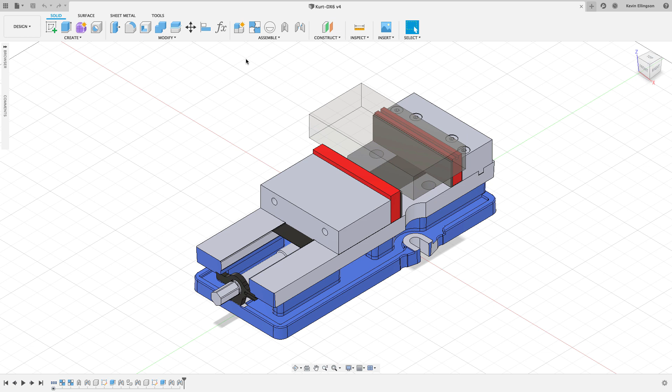And what do I mean by smart vise? I mean that we can go to the change parameters function, and in this particular case I have the ability to change the parallel height, width, and thickness, and the stock width, depth, and thickness, and also shift the stock. So if I were to change this number to be 10, you'll see my stock gets much wider. If I set this to be 5, you'll see the vise jaws open more. If I set the thickness to 3, you'll see it gets taller.

And if I offset it in the X or Y direction, I'll do 2 this way, or I'll do -2, and you'll see that the part moves around inside of the vise.

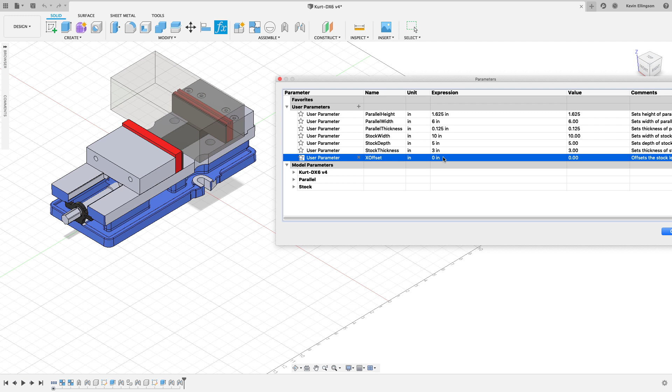In order to do this, we have to use a combination of parameters and some of the direct modeling capabilities inside of Fusion to get rid of some of the items we don't need, or to line things up, kind of get this vise moving the right way. Then we're going to talk about adding some joints that control the motion of how all these things work, and we're going to dive into parameters, both model parameters as well as user parameters. So stay tuned. We're going to go through and work on this vise project, and soon you'll be able to make your own parametric vises.

All right, so now that we know what the goal is, I've switched over to my web browser, and I've gone to kurtworkholding.com. You can choose any vise manufacturer that you want to visit for this. Most of these people are going to have their models available on their website, and if they don't, you should contact your salesperson, who can probably arrange to get you the models that you want.

I'm going to go to the work holding products, and I'm going to choose their Ang-Lock and D-Series vises, and then the one I want is this Kurt DX6. Now, it gives me a bunch of information, but the thing that I really care about is down towards the bottom. I'm just going to click on this little

CAD module thing. And I want to do a 3D, but I want this to be in step format. So I'm going to go find the step format. Then I get a couple choices here, AP203 or AP214. These are different standards. You can check them out on Wikipedia if you want to see what the differences between these two are. I always like to go with AP214 if I can.

I don't want this to be zipped, so I'm going to uncheck that. I'm going to choose download, and then Kurt's website comes up and says you can drop this into SolidWorks, or if you just want to download it to your computer, click on this link, and that's what I'll do. And now I have that file downloaded to my computer, so I can switch back over into Fusion.

I'm in a new design. So to open this file up, I'm just going to go ahead and hit the File Open button, browse to my computer to my Downloads folder, and there's the file, and I'm going to choose Open.

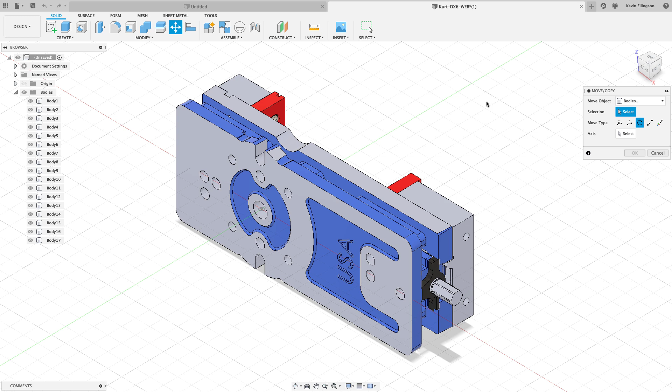I'm going to use some of Fusion's built-in direct modeling tools, and then I'll use history later on. The first thing I want to do is a move command, using move copy found under the modify dropdown. I have to decide what I want to move - right now Fusion is set to bodies, and if I look, all my bodies in this model are bodies, so that's okay. If I had components, I'd want to use components instead. So I'm going to click on the first body, hold shift, and click on the last body.

Then I'm going to click in axis select, and I think the axis I'm going to want to use is going to be under the origin - it's going to be the x-axis. And now I'm just going to pull this, rotate it 90 degrees, and hit OK. Now I have it in the right orientation that I want.

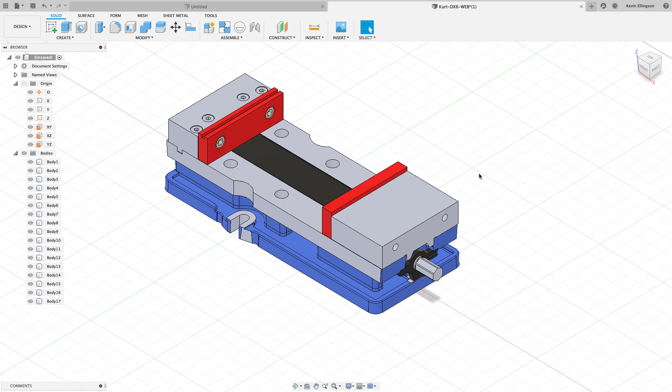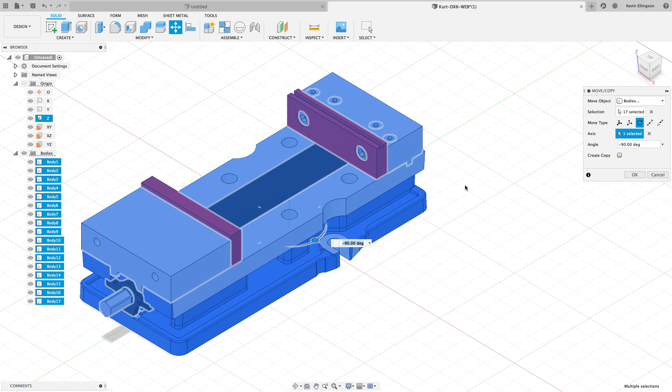I'm going to do another move, selecting the first body and the last body while holding shift down. This time I want to do it around the Z axis, so I can click on my home button. I'm trying to get this oriented how it would be in the machine table. So I'm going to do a -90 so that the front of the vise matches the front of my view cube and would match the table on my machine. And I'll go ahead and hit OK.

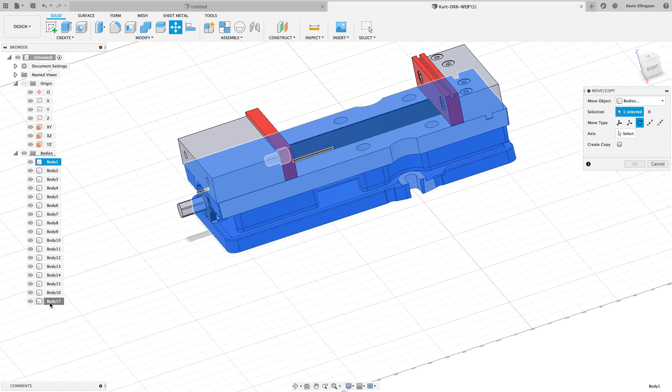The next thing I'm going to do is a little bit nitpicky maybe. If you note that the origin is sunk down below the face a little bit, it's not on this bottom face, so I think I'll do a point-to-point move to get that all set up. I'm going to do the move command again, clicking on the first body and the last body, and this time I'm going to do a point-to-point. My first point is going to be the intersection of that circle right there, and the target point is going to be my 0 origin dot. When I hit OK, it barely moved, but now you can see the crosshairs are exactly on that bottom face of the model. I've got my orientation set and out of the way.

Now I'm ready to start doing some other things in this model that I need to do before I can move forward. I want to go through and clean things up a little bit. Remember, the goal is to get an accurate representation of the envelope of this assembly, not to make everything exactly perfect. So a good example is, do I really need to track these 4 screws on there? Am I really going to change these out as I'm creating my setups inside of Fusion CAM? And the answer is no.

So we can use the combine command inside of Fusion to combine these bodies together. I'm going to use combine, and the target body is going to be that non-moving jaw. Then the tool bodies are going to be these parts going across here. I'm going to select those and hit OK. Now you'll see when I turn off that body, I got rid of everything that was associated with it - I turned that into one lump part right there. That's going to help me have less parts that I have to deal with on this model.

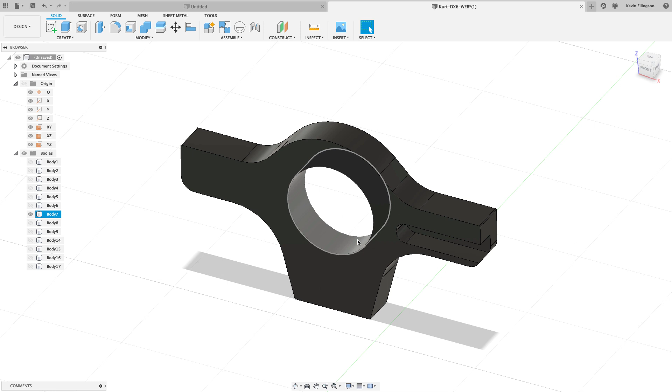I'm going to isolate this - right click and choose isolate. I guess I have to do it over here, right click and choose isolate. Now I only have this particular part left. I'm not going to be able to combine the shaft that goes through here because the diameter is a bit bigger, but what I can do is use Fusion's direct modeling - I'm going to click on that face and delete that off. Now I just have that part. So I'll right click and unisolate.

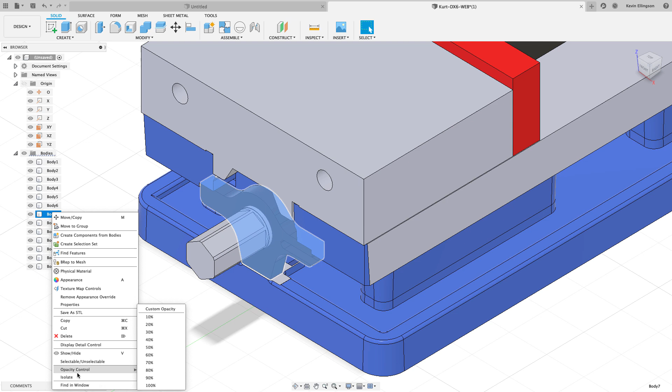And then now I want to have parts 4 and part 7. I guess I can isolate this again, and I'm going to turn body 4 back on. So these are the 2 parts.

I'd really like these to sort of be one, so I'm going to combine these together. My target body is going to be this, and the tool body is going to be this, and we're going to do a join. I'll hit OK, and now those have turned into one single body.

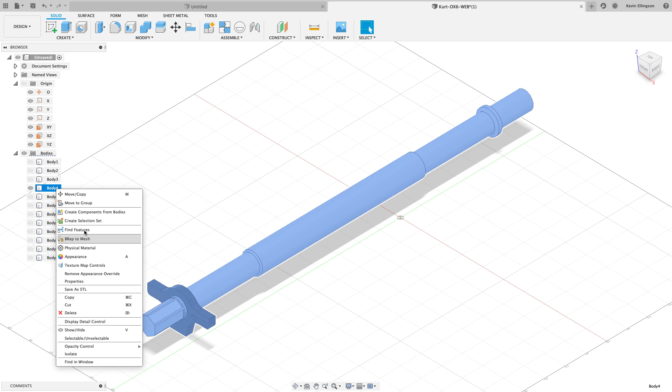Sometimes Fusion gets a little confused here, and because the body that I originally isolated isn't gone, I can't unisolate it, so I just have to manually come back and turn the light bulbs on to get that taken care of. Now you could do this for as much or as little as you wanted to.

You could, for instance, take these bolts and make these be part of the jaw as well, and the same thing on this backside. Maybe I'll try to do that. So I'm going to do a combine, and I'm going to say this is my target body, and my tool bodies are going to be this and this. Let's see if Fusion will let me.

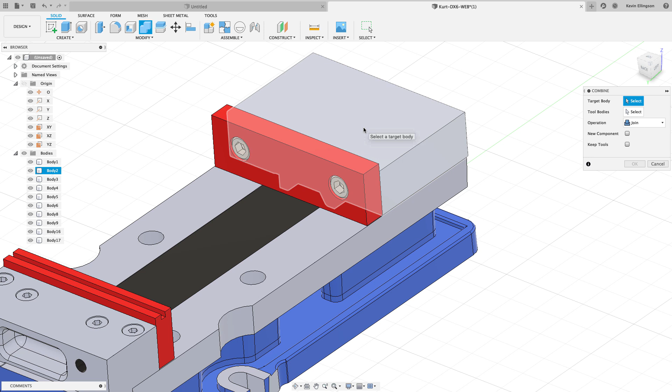And I'll hit OK. And now if I go find this body and switch that off, you can see it did — it allowed those screws to be part of that. And I can come over and do that one more time on this side. We'll say combine one more time. I'm going to choose this as my target body, and the tool bodies are going to be these two bolts. And now we'll hit OK.

And then if we check it to make sure it works out, it looks like it did. Everything is kind of going the way I want it to. Now I'm reducing the number of parts that I have in my model here.

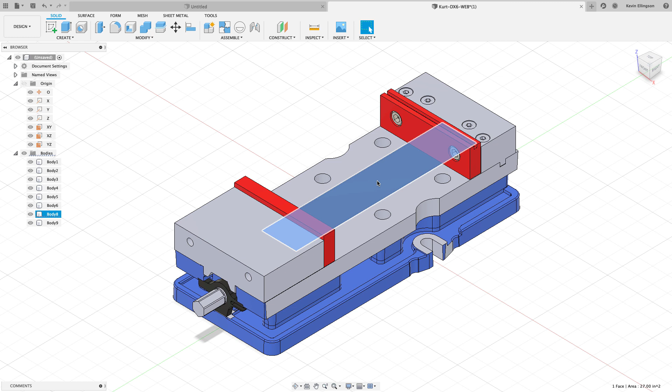There's a chip guard here as well, which might be a nice feature to have for actually doing the machining, but inside of the CAM setups, I don't know if that's really all that necessary. So I could either combine that, or I could just come here and delete it out. Let's find that body and do it out of the browser instead. So now I got rid of that.

I could have also cut it or combined it with the main body so it couldn't have moved around, but it's your choice of how you want to do something like that. But we've started to reduce the number of pieces that we have inside of our assembly, so we don't have so many things that we have to do joints or rigid groups to make this all work out.

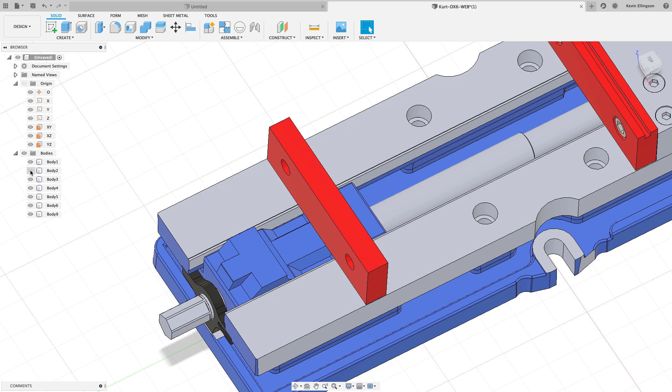I think I want to do a little bit more combining now that I think about it. If we were to look at body 3, which is a little — if I turn off body 2, you can see 3 better. I think they call it kind of like a nut or a shuttle nut or something like that. It's the thing that allows everything to slide back and forth. And then this is the moving jaw, or the moving body, I guess.

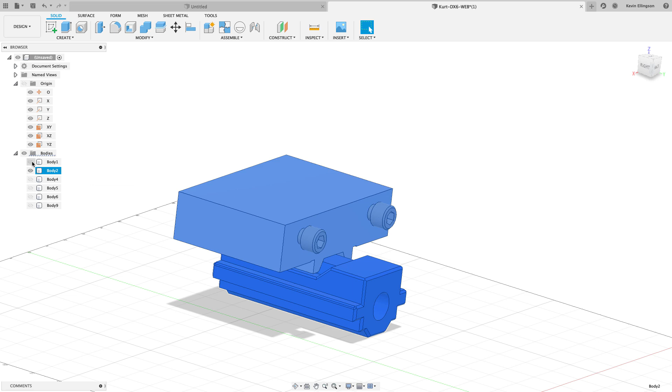I can combine those two things together as well to make life a little bit easier. So let me isolate that part and then turn body 2 on as well to make things a little bit easier. And now what I'm going to do is say combine, and this is going to be my target body, and this is going to be my tool body. It's going to be a join, and now we just got rid of one more piece. And then I'll just turn the visibility of these objects back on.

So the vise still looks exactly the same as it did when we first started, but we've reduced the number of bodies significantly on here, and we still have the same quality envelope that we started with in the beginning.

So now we can start to kind of position things and move them a little bit better where I would like them to be. This may be a little bit of my OCD kicking in here for this next step, but what I would like to do is position the two jaws so that they are shut together. There's no gap between them.

And one of the reasons I like to do this is later on we're going to put a slider joint on, and if we have the two vise jaws set together, we can easily do a minimum of 0 and a maximum of however the vise manufacturer says that this jaw can open up.

If you use stock sizes that are smaller or bigger than what the vise can do, you'll get a warning message letting you know there's an issue, which could be helpful down the road.

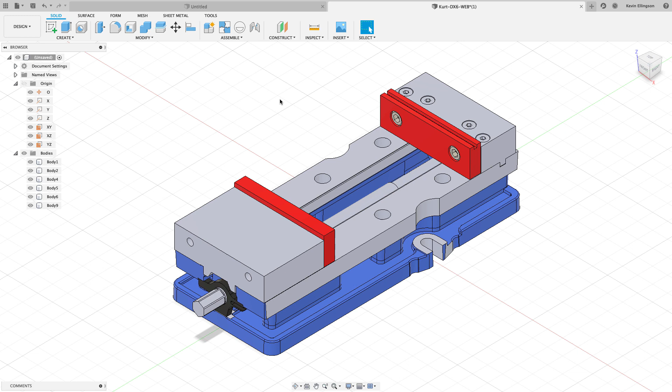To get these things lined up, I'm going to use the move command. But before I move it, I want to know how far it is between these faces. I'll use the measure command, clicking on one face and then the second face, and Fusion tells me that's 2 inches. I can either remember that, or if I click on the number in the measurement, it copies it to the clipboard so I don't have to type that number in.

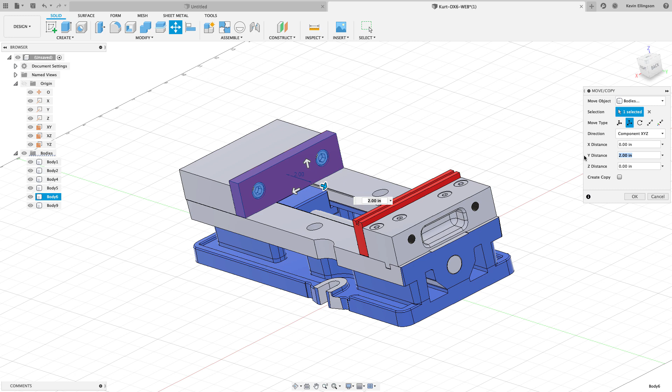So I'm going to use the move command. I'll use the translate, and I have to translate these two components twice. I'm going to click on this face, and move it the direction I want to go, putting that in the Y. I'll just do Command V on a Mac, or Control V on Windows, and it's going to move that into position for me.

I'm going to do that move one more time. I'll grab this component and drag it the way it needs to go, and again paste that number in. I'll hit OK, and now I have my vise jaw, or my moving vise, completely shut.

There's no gap there anymore, so I know everything is zeroed out, so that later on when I start adding my joints, I know exactly where the zero is and the maximum opening range of this vise jaw is going to be. This isn't 100% necessary - in fact, you could skip this completely and let the stock take care of it. You just won't be able to set the limits quite as easily as what I'm going to show later on.

So we've got this thing positioned, and you can see how nice it was to get those elements put into place just by using the move command. I haven't had to use a lot of rigid groups or joints yet to get things moving the way I want them to.

If you look in my browser, I have some things that are body names - body 1, 2, body 4, body 5, body 6, and body 9. Not very descriptive names. So I'd like to give these things meaningful names before I create components from them. I'm going to slow double click on body 1, and call this vise body. So now we have a vise body for that part.

I'll go to the second one - we're going to call this moving jaw. Go to the third one, and this is going to be screw assembly. Go to the next one, this is going to be fixed jaw. This one is going to be called jaw plate. And then the final one is going to be called grooved jaw plate. So those all have meaningful names.

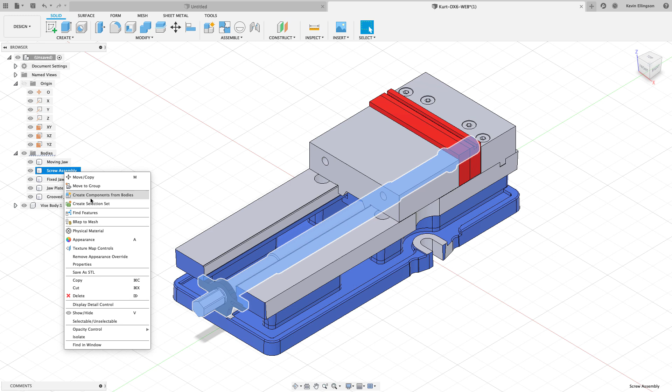Moving jaw, I'll probably hold off on that a little bit. I'll do my fixed jaw next, create components from bodies. I'll do my moving jaw, create component from body. I'll do my jaw plate - actually, let's do this grooved jaw one first, and then the last one I'll do is the jaw plate. I'll create the components from the bodies.

So now I have individual components in my design that I can add joints and things like that to. I'm ready to lock down the locations of these and start to make these components move around as this vise would. Let's take a look at how we're going to go about doing that.

All right, I realized I forgot a really large step along the way.

It's not that big of a deal, but I haven't saved this design yet. So I went through and saved it, but what you're going to want to do is go up and click on the save button, give this file a name, and choose where you want to save it in your project. I've got all of my cleanup work done in direct editing mode, and I think I'm ready to go and capture my design history from this point out.

But before I would do that, I wanted to point out that if I were to click and drag on this vise body, nothing happens. I'm not dragging and moving any of the parts. So to capture history, I'm just going to right click on my top level design and choose to capture design history. And now we'll see the design history appear down at the bottom.

And now if I try to drag on anything, everything is free to move wherever it wants to. Obviously I don't want that to happen, so I'm going to go ahead and revert that. You can use as-built joints for this. We're going to use some joints for this. We could do rigid groups. I'm going to do a combination of all of those so you can see the differences specifically between an as-built joint and a rigid joint.

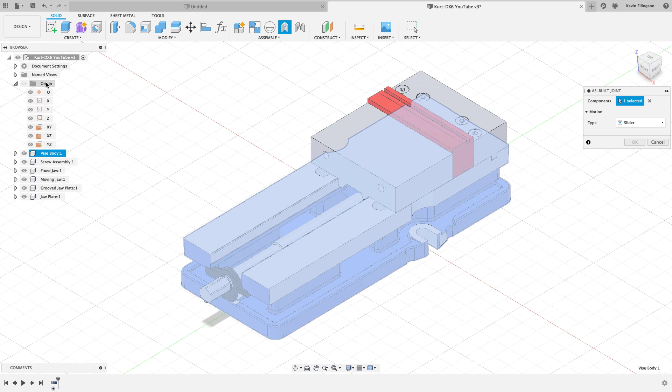So the first thing I want to do is make it so this vise body can't move around anymore. I'm going to recommend that you do an as-built joint between the vise body and the root of the origin folder, right where it says origin, and go ahead and click on that. We want that to be a rigid joint so that it's bonded and welded right into place. Go ahead and hit OK.

Now I can keep moving around. Maybe I'll do a rigid group between the vise body and the screw assembly, and I'll go ahead and hit OK. So two different ways to accomplish the same thing. Neither of these things will move now. I can keep working around, choosing whether I want rigid groups or as-built joints.

I think I'm going to use as-built joints, and I'm going to choose an as-built joint between this fixed jaw and the vise body itself, and I'll hit OK. Then I can keep going around. I'll do an as-built joint between the groove jaw plate and the fixed jaw.

That might have been one where if I would have done a rigid group, I could have gotten the vise body, the fixed jaw, and the jaw plate all in one, where I had to do that in two separate joints to get the same thing done. We'll do one more as-built joint between the moving jaw and the jaw plate, and I'll go ahead and click OK.

Now nothing is moving around anymore except for maybe the one thing that I want to move, which is going to be this moving jaw assembly. You can see I can move that and drag it around anywhere I want to. Obviously I don't want it to be just dragged out anywhere willy-nilly, so I'm just going to go and revert that and put it back into place before I create a joint that's going to control the motion there.

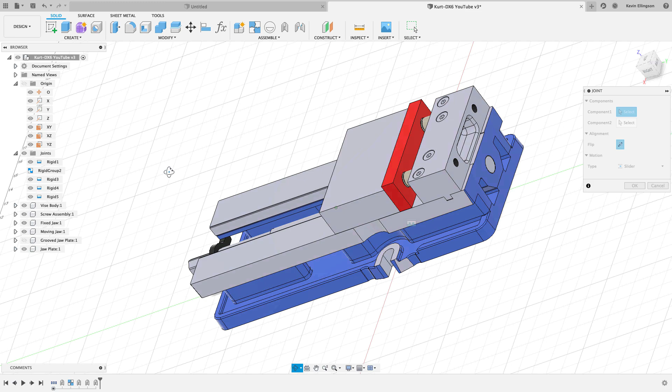So I'm going to start the joint command, and Fusion wants to know between what two components. Let me turn off the groove jaw plate just to make this a little bit easier to see. I'm going to scooch in here and grab the center dot right there on that face, so that's going to be my first selection. I can turn off that jaw plate and turn on the other jaw plate now, and make that same selection over there, and go ahead and click on that.

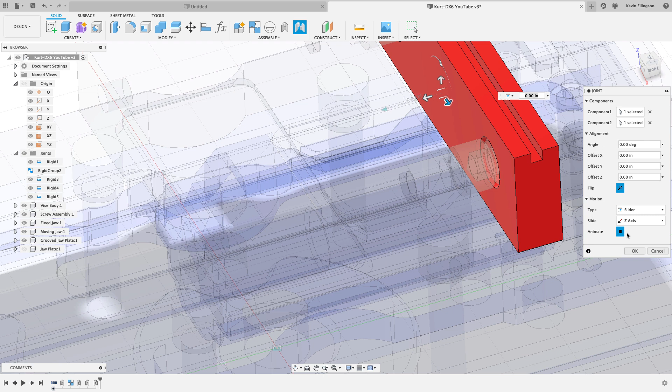And now I want to see a slider. So if I animate this, the thing that I really care about is when I see this number, in this case you see how the number is positive, not negative. I want that number to be positive. If yours is negative, you have to select your jaws in the opposite direction that you originally chose. So I'll go ahead and choose OK. Now I go back to my home view. Let's turn my jaw plate back on.

And now you'll see as I drag this back and forth, I'm able to get the motion I want, except for I can make the two bodies go through each other, and I can open this up way too much. So let's take a look at how we can fix that.

So the way I'm going to do that is I'm going to find this slider joint and edit the joint limits. Before I do that, I'm going to revert this back into position. Now I'll come back and edit the joint limits. I'm going to turn on a minimum, set that to 0, and a maximum of how far this jaw is able to open up. So I'm just going to go ahead and say 9 inches.

I don't really even know what the value is for this - I'd have to go look on the Kurt website. But earlier on, when I moved these two vises together and put a 0 gap between their faces, that was the reason I wanted to do that. So the minimum would be when they're touching, and then however far these vise jaws can open up. I'll go ahead and hit OK. Nothing really changed, but now when I drag this, I can drag it back 9 inches, and I can drag it to 0. And so the vise will open and close that way.

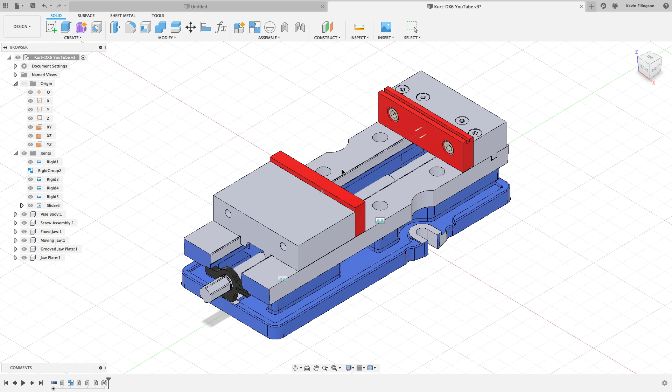And I'm also starting to see some visibility of joints on the screen. I can either turn off the root of the joints folder, or I could start shutting off the eyes for the different joints that I want to appear. It's not that big of a deal right now, so I think I'll leave them all on.

And we'll go learn a little bit about parameters and how we're going to make our parallels and our stock and then put them into position. Before I go any farther, I want to make sure I revert everything so that Fusion doesn't try to capture the position. So now I'm satisfied with everything I've done with this step model. I've got it positioned, and the jaws are opening and closing.

And now I want to start drawing some components that represent the parallels and the stock. I'm going to rely on one of the key features inside of Fusion called parameters. If you haven't used parameters yet, they're what makes using programs like Fusion so powerful - every number that you type into Fusion is being tracked by the system in some way, shape, or form. And you can always go and manipulate those numbers.

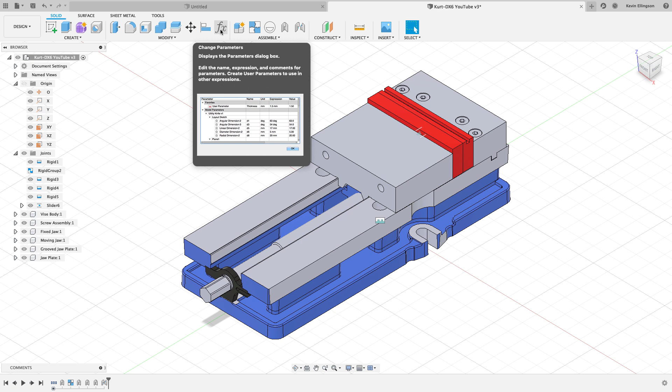So I'm going to use my FX function up here to get to the parameters. If you don't have this pinned yet, go to the Modify dropdown, and you'll find the Change Parameters button right there. So I'm going to choose Change Parameters, and I'm going to make some user parameters before I even get started. I'll just hit the plus, and I'm going to call one parallel height, in inches, and give this a height of 1.5, then give a description of 'sets height of parallels.' So the next person that needs to use this will understand what this parameter does, and I'll hit OK.

So I've created this parameter. This parameter essentially does nothing so far - it's just a parameter, not tied to anything, has no bearing on anything yet. Later on, we're going to make use of all these parameters when we create our parallels and our stock.

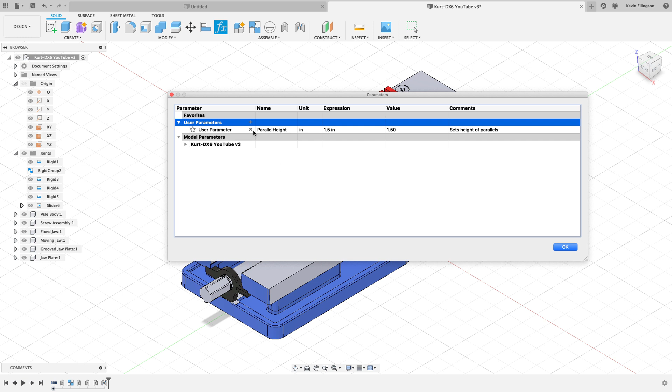So I'm going to do another one. I'm going to call this parallel width. You can see I'm using capital letters for each of the words that start this out - you can use whatever format you want here. The important part is the parameters you're going to refer to later are case sensitive, so if you want them to recall properly, you have to use capitals and small letters the same way you did when you created them. And the expression for this, I'll call it 6, and say that this sets the width of parallels. Go ahead and hit OK. And we want one more called parallel height.

So there we go, we'll call this parallel thickness, which is what this one needs to be. You saw that turned red, saving me from myself, because we have to have unique parameter names, and there's certain parameters that we can't use that the system has reserved. Like you can't call a parameter inch, in, mm, or foot or whatever it might be that's already reserved by the system. I'll call this 1/8 of an inch thick, and say it sets the thickness of parallels, and hit OK.

So now you can see that we have the comments here. I have a few more parameters to go. I'm going to call this one stock width, and we'll call this 8 inches, and I'm going to say sets stock width, and hit OK.

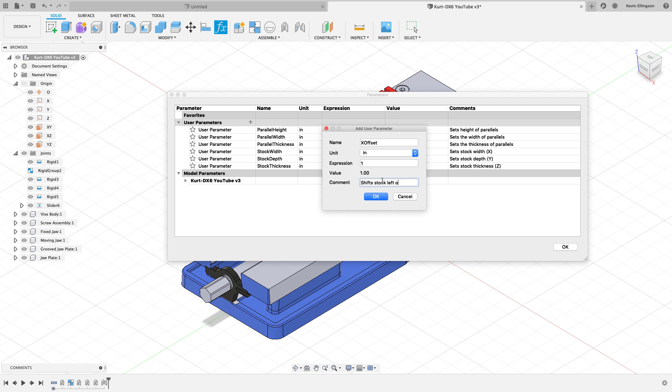I want to do one more. I'm going to call this one X offset, and I'm going to give this an expression. I don't have to give an expression of anything, I'm just going to give it an expression of 1, and I'm going to say shifts stock left or right. And we'll go ahead and choose OK. So those are the different parameters that we're going to reference later on as we go through and do the rest of our modeling. I'm just going to go ahead and hit OK.

And now I can come and pretty much shut all this off for a little bit. I don't need to see any of it. I could even shut off my joint visibility here if I want to. So I'm going to right click and say new component, and I'm going to give this component a name, and I'm going to call this parallel, and go ahead and click out of there.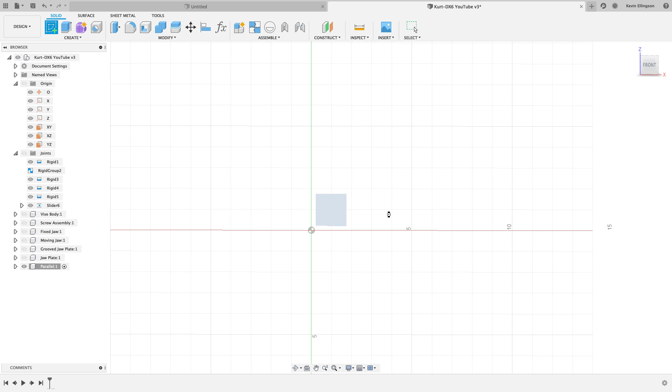And now I'm going to create a sketch on this front plane, and I'm going to sketch a rectangle, a center point rectangle, and I'm going to drag this out. And now instead of typing in numbers I want here, I'm going to refer to those parameters. So I'm going to call this one parallel, and see, as soon as I start typing that, it gives me choices. That's going to be my parallel width, and I'm going to hit tab, and then I'm going to call this parallel, and this is going to be my height.

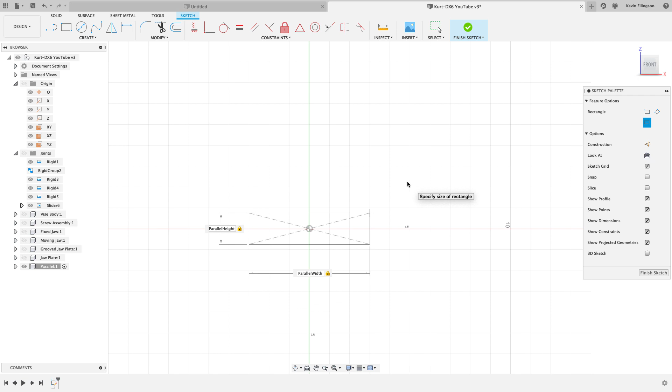And now when I hit OK, it's going to go FX and FX, and it refers back to those parameter names that I created, so that it's already set to those values that I set when I created the parameter names. Go ahead and extrude this, and I'm going to call this parallel, and we'll call that parallel thickness right there. And there's my parallel that I'm going to work with.

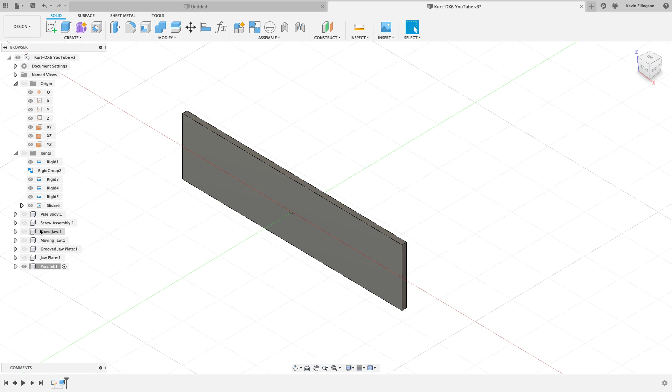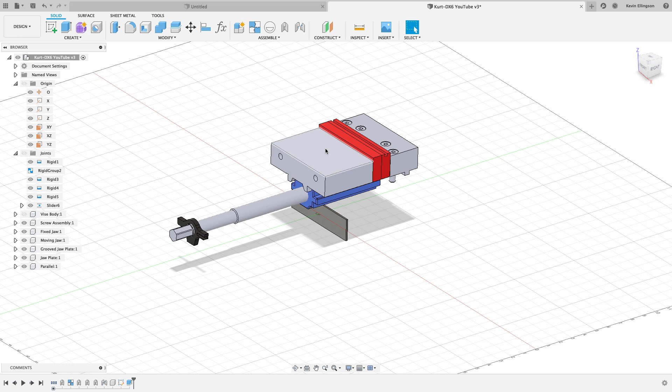All right, so I can start to turn this stuff back on again, and then I'm going to activate the top level assembly. Now, almost always, I don't need to see my vise body here either. I can shut that off to make my life a little bit easier. Almost always, I don't want you to ever really have to deal with this capture or allow, or capture or revert, I should say. I kind of was thinking of the PC and Mac commercial, cancel or allow. But in this case, I want to make it easier on myself to get these parallels stuck in there.

So I'm going to open this up. And when I do this, capture position or revert is going to pop up. I'm going to choose to capture the position here. And then later on, we're going to come back and we're going to delete that.

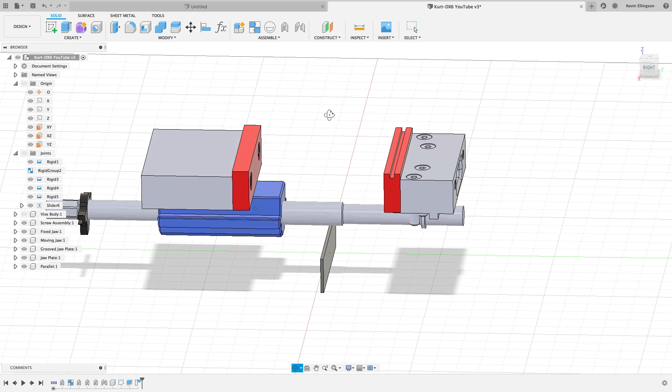So now what I want to do is I want to position my parallel in place by using a joint. So I'm just going to go find the midpoint right there. Let me do that again, I missed it. Little helpful tip, if you ever want to lock on to certain places, if I hold the control or the command, depending on if it's Windows or Mac, I can lock onto those so that I can't go and shift anywhere else.

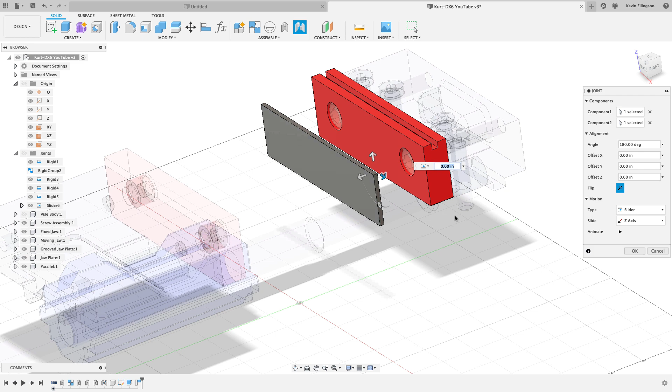And we'll just do the same thing right there and grab that spot. Now that parallel is going to move into this place. I don't want it to be a slider, I want it to be rigid. It's not going to move. And I'll go ahead and hit OK.

So there's one parallel. I'm going to right click on this parallel and say copy, and then right click on my design name and say paste. A second one's going to appear. Now I can move this around, make it a little bit easier to grab onto.

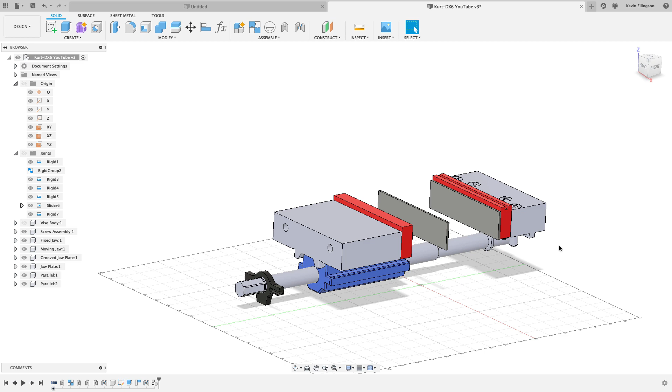And now I'm just going to do another joint based on that point right there, mating up to that point right there. And that's going to move into place. Now I've got a set of parallels created there. So that's good, I've got my two parallels in place. Everything's good to go. All right, now I can start creating my stock component.

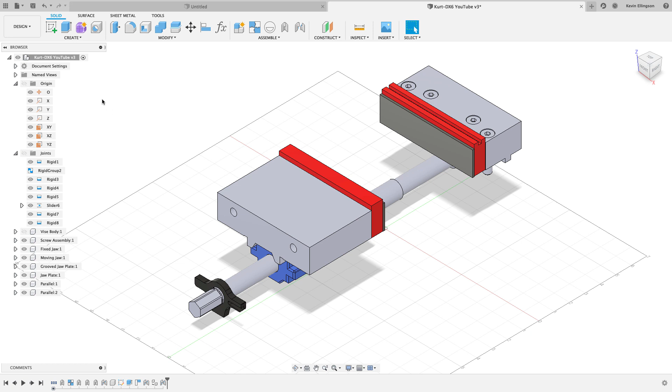So I'm going to come up and I can shut some of this off as well. I can leave it on, I can shut it off. I'll just shut it off to make it a little bit more viewable. I'm going to right click and say new component, slow double click on this newly formed component and call this stock. And then I'm going to create a sketch on the top plane, and I'm gonna do a rectangle,

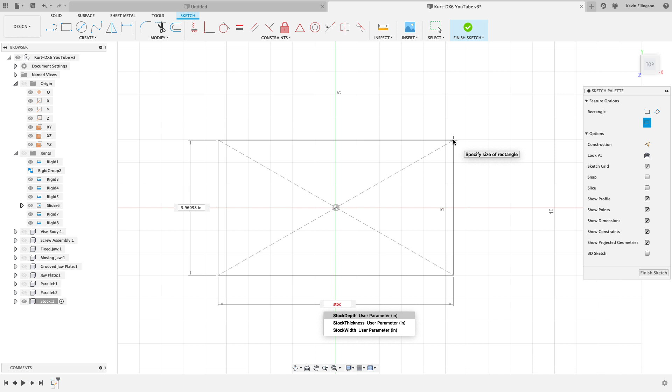center point rectangle, locked to the origin. Now I'm going to use those parameters I pre-created again. So I'm going to call this stock width and go select that. Hit the tab key, and this is going to be stock depth. There we go, so I got the size of my stock created. I'm going to finish my sketch.

I'm going to extrude this and call this stock thickness. And I'll hit OK, and now I've got the thickness of my stock created as well.

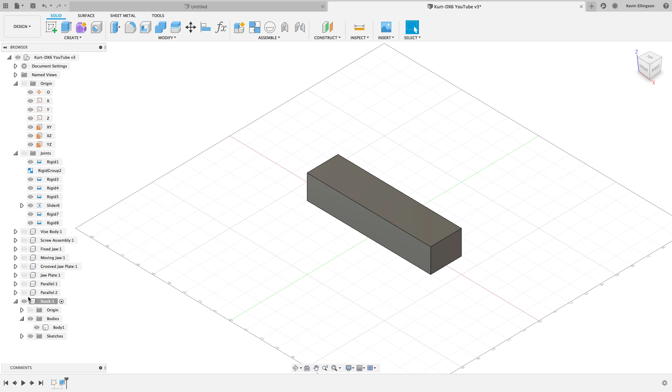When I use this in my designs, I'd like this to be sort of transparent. So I'm going to expand out my bodies, right click, and go find the opacity control. I'll set this to about 50 or 60%. It won't appear see-through until I activate the top level.

So let me just go and activate this top level. Now you can see that it looks more like glass, and I can come back and turn more of these components back on. I'm going to leave that vise body off for a little bit longer.

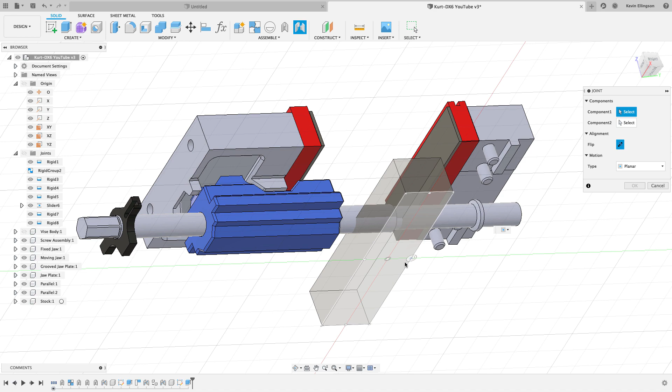Now I'd like to position this piece of stock on my parallels. So I'm going to do that by using a joint, and I'm going to select, the first one's going to be that position right there. I'm going to roll over, find this top face, and hold the control or command button down just to make my life a little bit easier to select that. And Fusion's going to use a planar joint.

I want that to be a rigid joint. And I've got that located. Now I like to drag it left to right, and that'll tell me what number it is I need to change in the numbers right here. I could also look at my work coordinate system and figure that out as well. But I'm going to call this my X offset, and that should automatically shift it over the 1 inch that we set up when we created this.

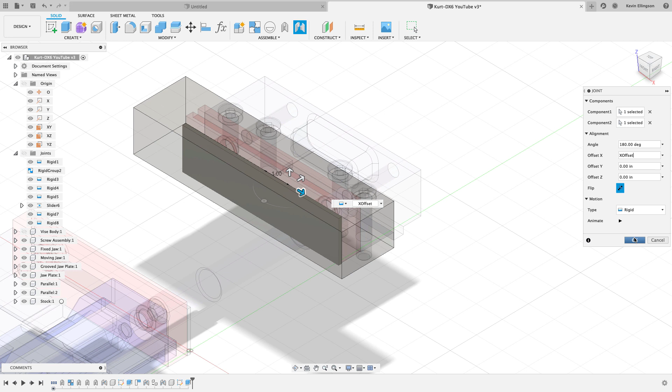We'll go back and switch that later on. We'll just go ahead and say OK there. All right, so that's looking pretty good. And now I think what I'm going to do is shut off this vise jaw visibility.

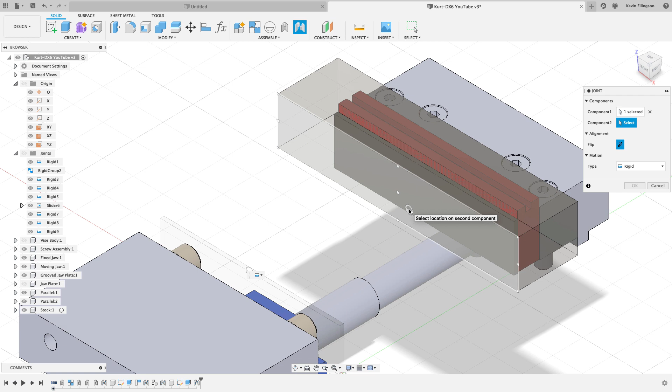And I'm going to do another joint. I'm going to choose to do it between this back face right there, and then I'm going to choose it somewhere right there, grab that point right there. And I don't want this to be rigid, I'm going to flip it right away, and I'm going to say I want it to be a planar joint.

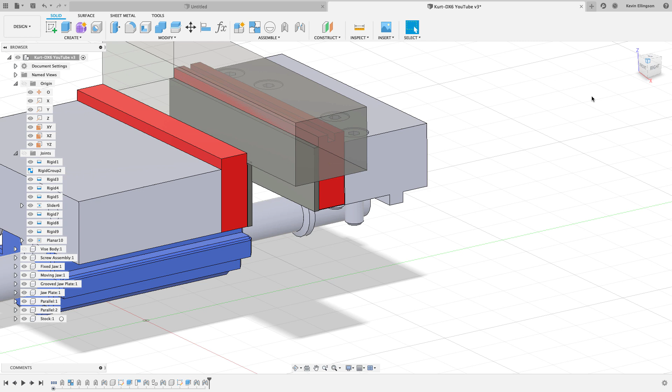Now when I hit OK, if everything goes well, that part should move up against where I want it to be. And if I turn that jaw back on, it should be positioned exactly where I want that to go. So now I've got my part sitting on my parallels, and everything should shift and work right now the way that I want it to. So I'm going to turn my vise body back on.

And now I'm going to go back to my parameters, and let's see if I can manipulate this around a little bit easier so we can make it easier to see. So that should be pretty close to working right there. Shift this down a little bit more. Okay, good. I'll move this off.

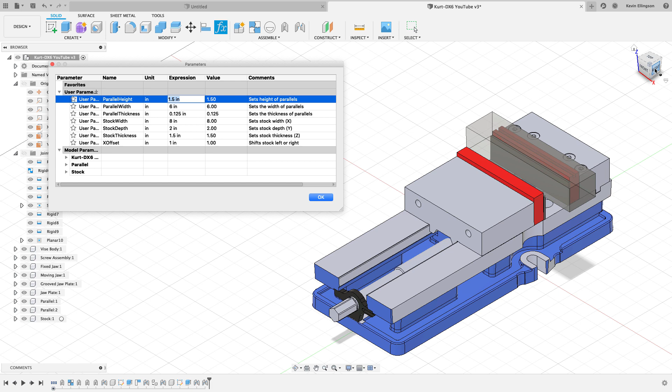I'll put the vise on the right and the part on the left. So now you can see if I were to look at this from the side and I change this to be 1.625, the parallels get higher and the stock shifts along with it. If I shift this over, I could change my parallel width to 7. It should get wider than the vise jaws.

If I change it to 4, it should get shorter than the vise jaws. Good. So let's shift that back to 6 where I want it to be. If I change the thickness, I'll say 0.05, it should get a lot thinner. And if I go back to 0.125, it should get back to the thickness I had it at.

So that looks to be working okay. I'll set my stock width to be 10. That shifts the right way. If I go to 4, that shifts the right way. Okay, so let's click that back to 8.

If I change this to be 5, it should open up. If I change it to be 0.25, it should close the vise jaws down quite a bit. So let's set that back to about 2. And then I'll change the thickness to 0.5. That looks good. Change it to 1. Maybe I'll just leave it right there.

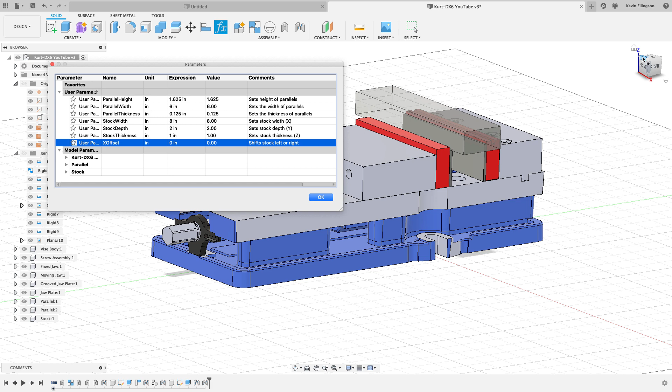And here's that shift. So if I set it to 0, it should now be able to look at it from a front top view. So there you can see it's exactly centered. If I put a positive number in, it should go to the right. If I do a negative number, it should go back to the left. So I pretty much have complete control of where my stock is positioned in my vise now.

And I'm pretty happy with how everything is working. So there's the steps that you can take to use parameters and some built-in modeling functions inside of Fusion to get your vise set up. So let's take a look at one more thing about how you might use this in a future design.

I'm going to go ahead and save this, and then we'll see how we're going to do that. So you might think the way that we use this vise is to bring the part into the vise, but that's the wrong way to think about this. We're going to bring the vise into the part is how we're going to do it.

So I'm going to go to this untitled file folder. I guess I can just shut it down. Let me open this up, and inside here I'm going to have a part in here called hub, and I'm going to choose to open this. And this is a part that I got it from the Autodesk Cam Samples directory, and then I just want to take this and either ground it, or as you can see, I've got an as-built joint placed on it, and I'm ready to now bring that vise in.

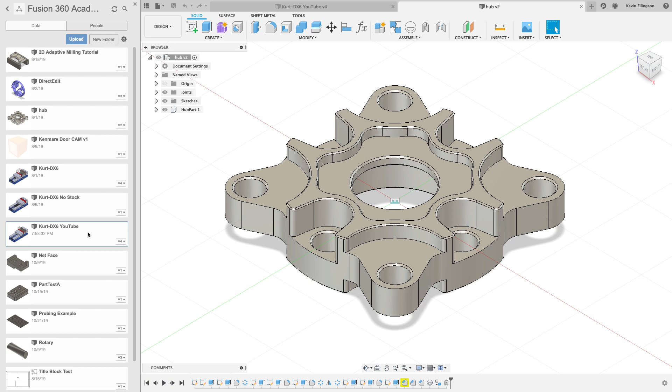So the one we've been working on is this YouTube one. I'm going to right-click on that and say Insert into Current Design, and we'll let Fusion just sort of go ahead and place that. I'm going to drag this around a little bit, and I'm going to hit OK, and now I can close my data panel out. And we're going to go back to that vise.

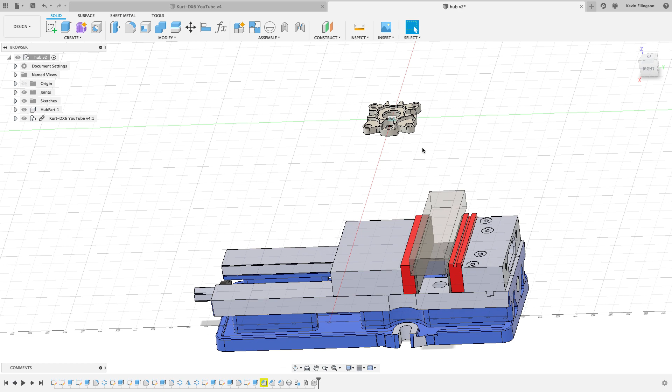I realized I forgot one more little step, not the end of the world, but we're going to go back there and fix that. So there's the part that I need to work with. It looks like it's definitely got to be opened up a bit more.

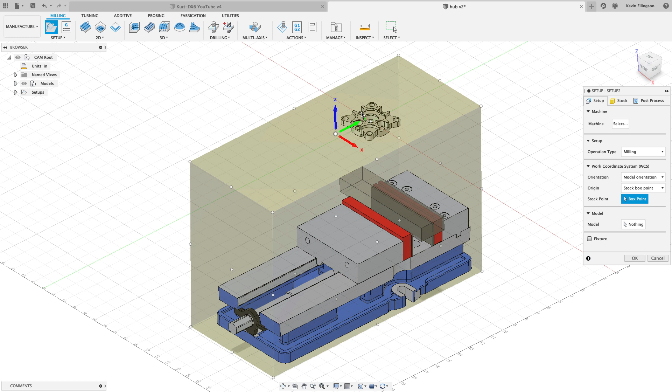If you wanted to find the exact size of this, I could switch over to the manufacture tab really quick and just say, here's an easy way you could do this. I could say I want to use this as the thing that I want to machine. Sorry, let me do that one more time. New setup. The model is going to be this part. And now when I go to my stock, if I choose a fixed size box for me, I can see that I'm going to need something about 3 by 3 by 3/4.

So if I did maybe 3 1/4 by 3 1/4 or 3 1/8 by 3 1/8 by 1, that should be a pretty good size for me. So I'm going to go ahead and hit cancel on that setup, and I'm going to go back to my design tab.

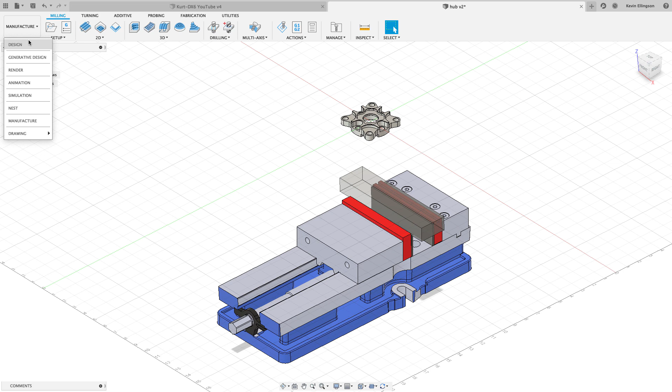Now, right now this is linked. You see the little link symbol up here. I'm going to right click on that and choose to break the link, and now my parameters are going to become available to me. So I can come over here and say, all right, my parallel height and all those things for right now is good. Let's call this 3 inches by 3 inches.

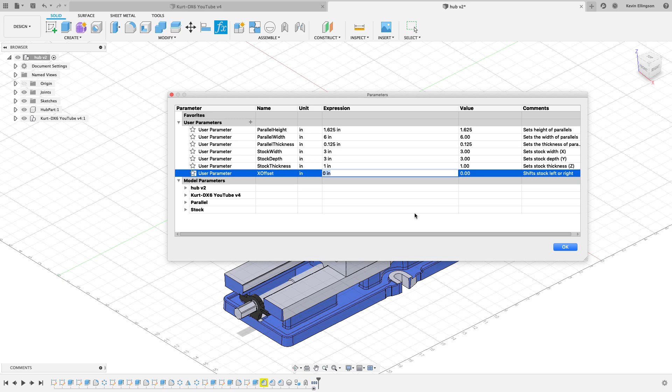The 1 inch that I wanted, I don't want it to be offset in the vise at all. I can go ahead and hit OK. And now that part should fit in that stock pretty well.

I'm going to assemble the stock to the part. So I'm going to do a joint between the top face right there, and then I'm going to hover my mouse over this top face, hold my control or command button down until I get that. And then I'm going to look at this from the side.

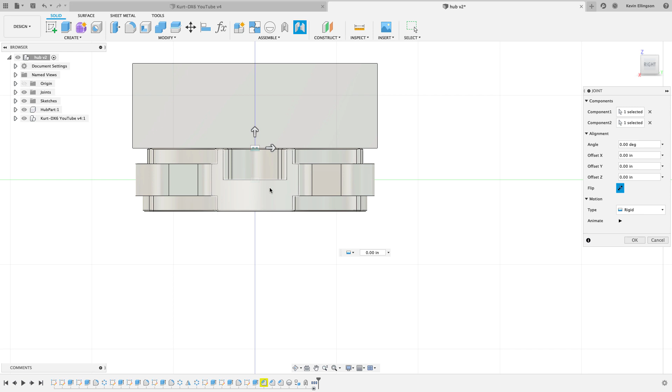I don't want that to be a planar. I want that to be a rigid joint. I'm going to flip it, and then I can raise this up or down. I'm going to raise it up a little bit so I see which field it is I have to change. It's the Z, and I'm going to do maybe 20 thousandths of an inch that I want to face off, and I'll hit OK.

And now my part is positioned in the stock and it's in the vice jaws. So it was pretty simple and easy to get that thing positioned this way. Some parts will fight you a little bit more if they're not symmetric like this and don't have a good symmetrical point to insert them into the stock like that. But you can see it's pretty simple to get this part in there and have a look at it.

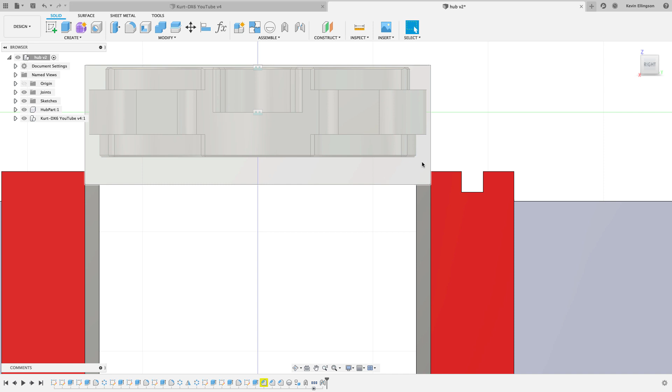Now I could look at it and say, well, that should be enough. I'm above my vice jaws with plenty of clearance. I could do this as a carrier style part. Everything should be good to go with that.

All right, so let's go back. Let me close this out. Let's go back. What was the one step I forgot to do here? Remember, I had that capture position. These capture positions can be problematic. I wouldn't so much worry about one capture position—it's when you get a lot of capture positions in your design that Fusion starts to slow down.

So I'm just going to right click on this capture position, if it'll allow me to. It's being a little difficult, so let's see if I can switch windows and come back to it. There we go. And now I can just say delete. Because the joints are there, it can't move around. Everything is good, and so I've just got rid of that capture position.

And now I've got a functional vise that I can use over and over again on my programming. I don't have to do any mental gymnastics to figure out if I'm going to be close to my vice jaws or what kind of stock I need and how far above the vice jaw I'm going to be. I can just assemble my part into the stock. It's pretty quick and painless to do it from this point on, and I can get a more accurate setup to have more confidence when I get out to the machine that I'm not going to run anything that I don't want to.